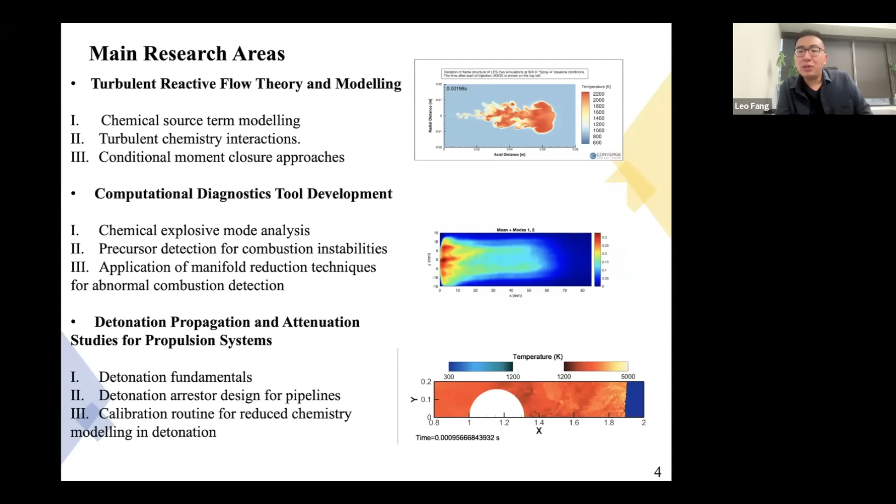So for this particular talk, my focus will be mostly on the first topic, which is turbulent reactive flow theory and modeling, and then specifically introduce one technique we think is suitable, maybe as an alternative for doing partially premixed flames. So a little bit of background. I'm sure a lot of you probably know this quite well, probably better than I do anyway. So what is turbulent reactive flow modeling? In CFD solvers, we would have transport equations for Navier-Stokes, energy and mass, etc.

And if we go with a symbolic form of the Favre averaged species transport equations, we can roughly divide the entire system of equations into a couple of things. For example, we have the rate of change term, and then the convective term, and that should roughly equal the diffusion term as well as the chemical source term. So the focus of my research is the closure of this term, called the mean chemical source term.

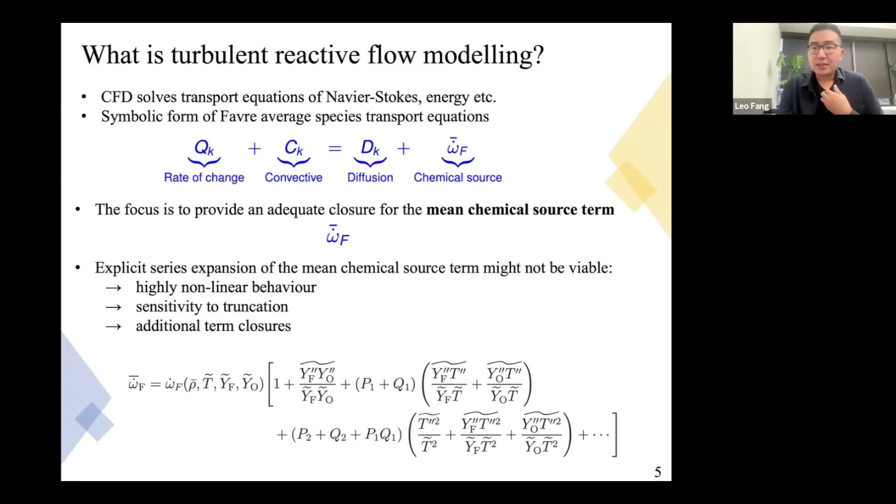So why is this term fairly important? Because an explicit series expansion of the mean chemical source term might not be viable, because it is highly nonlinear and very sensitive to truncation, and it needs a lot of additional closure for the different terms we include at higher order. So what options are available, and why is this difficult? The difficulty with turbulence chemistry interaction is that there are different scales we're trying to solve.

So on the left side, we have a physical system, in this case a reacting flow system. We have the chemical time scale, which means that for methane burning, for example, some chemistry happens at very fast time scales, and some chemistry has very slow time scales, for example NO formation, which is always a challenge for turbulent reacting simulation. And because it is a flow, we also have to cater for flow, turbulence, and diffusion timescales. This is relevant to non-reacting flow simulations, for example the approaches for closing turbulence terms.

So the idea here is that if we want something as accurate as we want, we probably want to resolve along this line, where we resolve everything about the chemical time scale and everything about the physical time scales. It is a bit of a challenge, but we will get something with good accuracy. And this is usually where DNS lands.

But in reality, if we are designing an industrial burner or an industrial product, at least from my experience, most industry partners are using techniques at the RANS scale, or some in the large eddy simulation range. So in that case, we will be resolving somewhere near this range, which means how we account for the interaction between the chemical and turbulence scales is a bit of a challenge. So this is what we are focused on, turbulence chemistry interaction models, and seeing if we can have a better model for the different conditions this flame is running at.

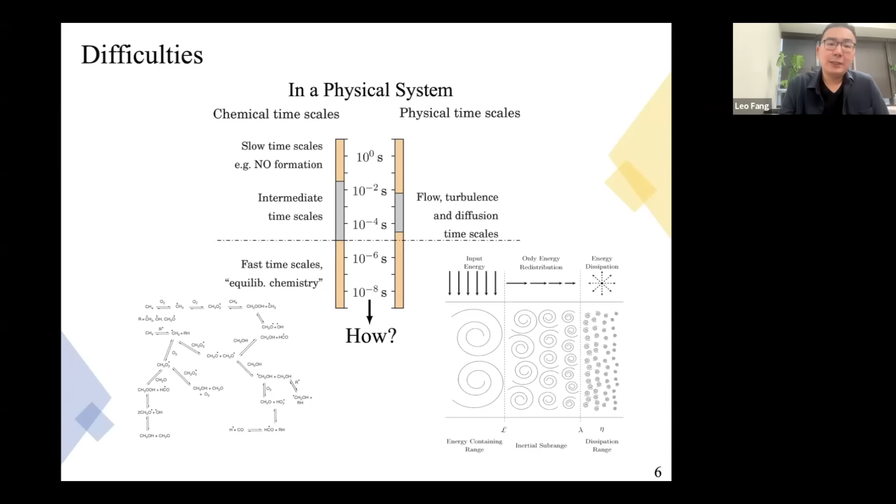So there are a lot of options available, and there are options that have been around, and there is a lot of development for each stream of this. I'm just going to do a very brief introduction of some of the techniques, but obviously there are a lot of other options and a lot of advancements around these topics.

So first of all, for a lot of us using OpenFOAM or Converge or ANSYS, one of the very well established, well used models is called the well-stirred model. What this does is assume infinitely fast mixing compared to the chemical reaction timescale. That means whenever you do a cell calculation, you already assume that the turbulence has well stirred this cell, and you have a well-stirred composition that you are taking into account,

which can help to understand the combustion itself. The advantage here is that you can incorporate detailed chemistry, and you can do a direct integration approach and evaluate the mean reaction source. There are some advantages because obviously it is widely used, so you will see this quite often, and it is probably integrated quite well with a lot of the software. But in this particular case, you might only have the first order moment, which I will explain, or only the mean of the scalars are considered.

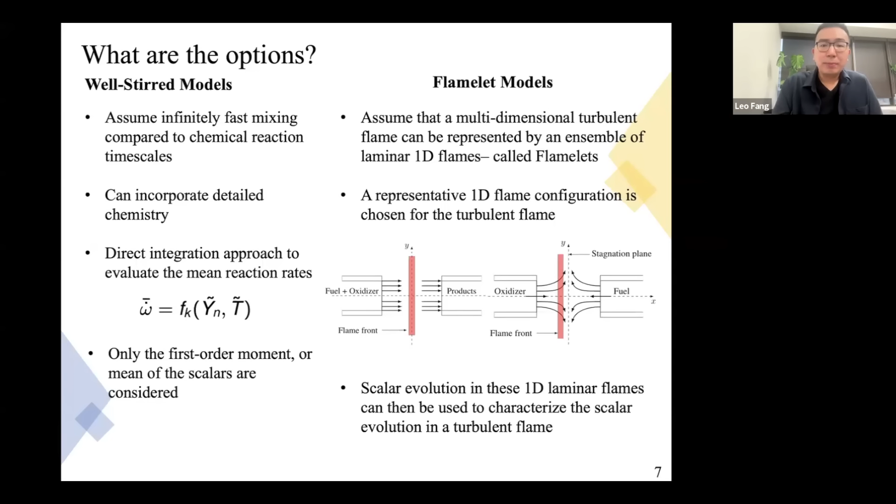For me and my group, we use a slightly different approach, and obviously this is not a new approach either. I'm going to slowly introduce this idea if you're not familiar with it. It's called the conditional moment approach. What we really care about is simulations that are not fully resolved. If you think about the scale graph, we're not reaching the scale of fully resolving chemistry and turbulence. We care about simulations relevant to RANS and large eddy simulations.

What has been found is that using the first moment might not be accurate. The idea here is to use a conditional variable to approximate this term, with the assumption that the conditional average does not fluctuate too much. So how do we explain this? If you look at the right graph, assume this is the flame you are simulating, and this is a representative grid you have in LES. Imagine you're setting up an LES simulation, and this is the finest resolution your grid is actually solving.

But magically, at the periphery of the flame, we happen to know the DNS exact result for this entire flame. That means you're looking at this grid, and this is what actually happens underneath it that your solver does not know. If we're using a first moment variable, say an Arrhenius type approximation for the chemical source term, we're using the average temperature, average mass fraction, and average density at this particular grid to get our reaction rate.

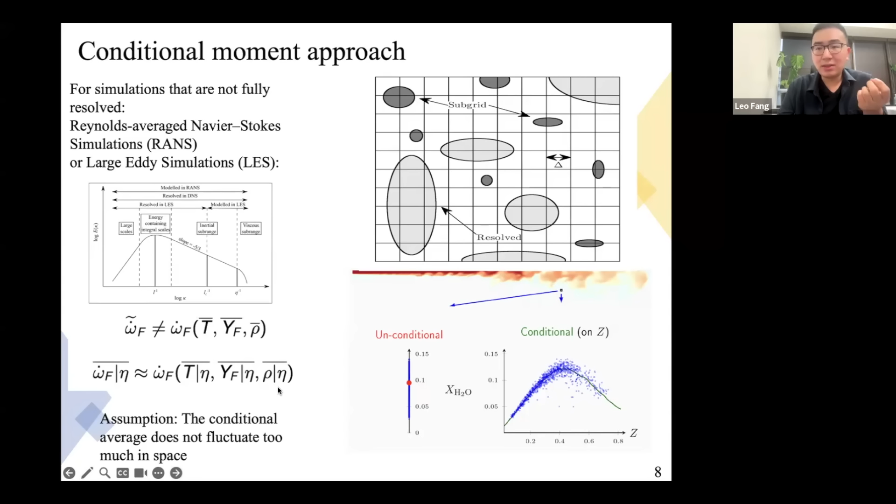And then obviously the challenge comes for any single particular field here. How do we get these values, right? Because if we want to approximate it, we still assume Arrhenius type. And then how do we actually get the values inside this bracket? Because the chemical source term is a function of these values. So one approach here is conditional moment closure.

The easiest way to think about this is: how about we just transport the conditional variables? Because it's a simulation, you can create any variable and transport it in the flow field, as long as you preserve the laws of conserving mass, momentum, energy, and species for combustion simulations or turbulent reacting flow simulations.

But obviously the challenge here is that when we try to close this, there will be quite a lot of terms. And because you are adding a lot of transport equations, it might be a bit computationally expensive. This is a very well-known approach, and there are a lot of new developments here. I'm not gonna elaborate too much, but that's one way of doing it.

So our thought, which came from my previous advisor, Kendal Bushe: we know that this is what we don't want for a particular flame, especially the one that I just showed, and we know that this is an approximation. We also know that in order to run a simulation, you have an initial condition, or you have already run the simulation from the beginning of the time steps. You prescribe an initial condition at least, which means at the previous time step, you would know exactly from the CFD solver the unconditional value of this, right?

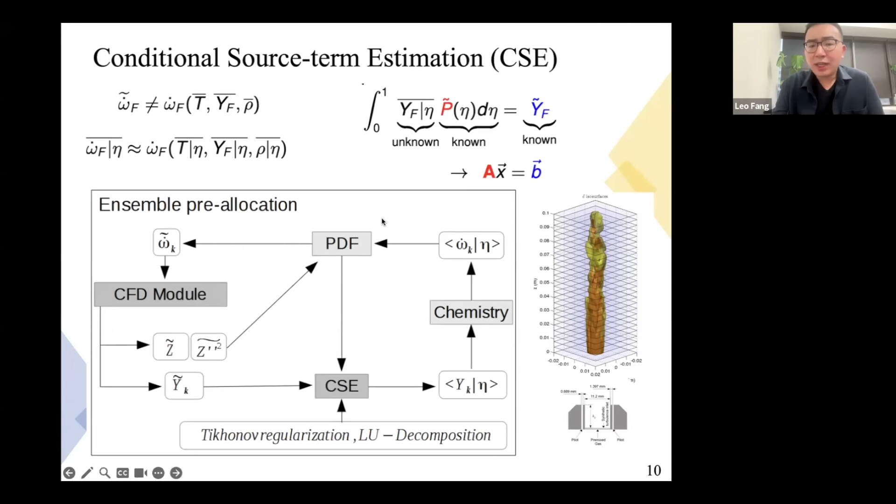So in this particular case, we did pre-allocation of the conditional source term estimation for the cell prior to the runtime. And then we did a bit of overlap of the ensemble, because we want to eliminate a little bit of discontinuity. And then each ensemble is assigned to one processor, ideal for flames with clear symmetry. This particular case, obviously, is a jet flame, so we can assume that. And this has been successfully implemented in Sandia methane flames, including C, D, E, F, where extinction becomes a bit more extreme.

And so one of the things that we had here was obviously the inversion, because all we really cared about was the conditional value here. And in this particular formulation, it is not about mixture fraction, it is about progress variable. So it can be used for both premixed and non-premixed, which means you can actually do the inversion, and then you can use Tikhonov regularization. We want to explore a few more regularizations in the near future as well, because there might be more developments in linear algebra that are probably way better than what we have done before.

And then we can reduce the matrix through some matrix manipulation to regularize it and to reduce the size of the matrix when we do the inversion. And then with a little bit of decomposition, we will get what we want, which is the conditional variables. So with that, we can sort of do lookup of chemistry. So this is similar to what a PDF method would do.

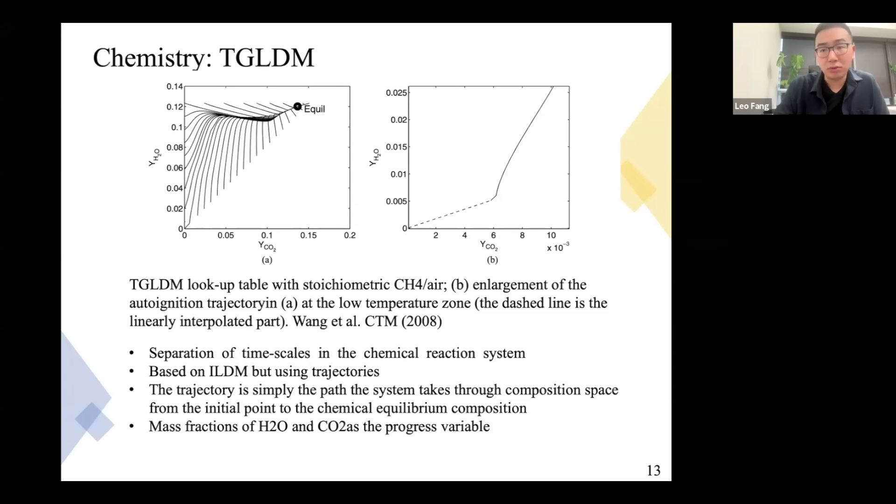So in this particular case, previously, they have used TGLDM, trajectory generated low dimensional manifold, in which we are using CO2 and H2O as a representation of the entire manifold. And then we can do the separation of the time scales in chemical reaction source terms, and then we do lookup, and we use the mass fractions of H2O and CO2 as the progress variable. So these were all developed before.

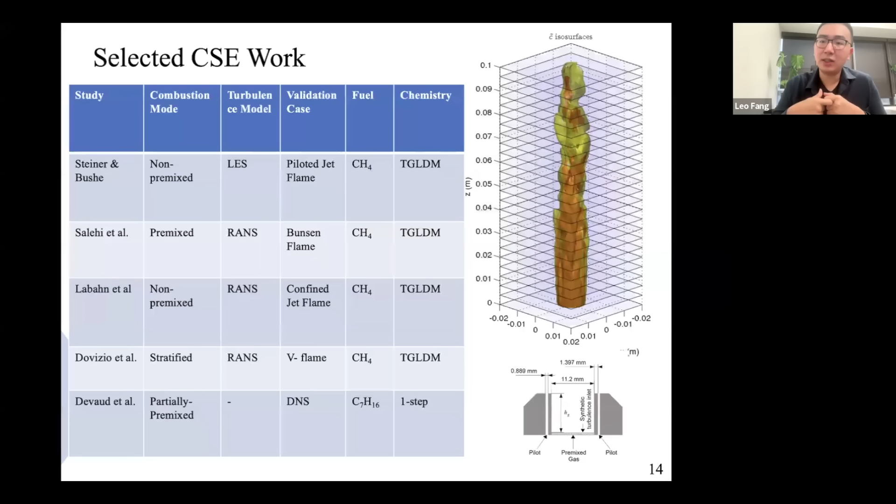But the challenge really here is that if you look at the successful implementations, at least before my PhD, most of these studies are actually relevant to methane only, and there is one more study relevant to n-heptane, but it's an a priori study for the CSE routine. So my PhD really revolved around whether we can improve this, because we found using TGLDM chemistry a bit more challenging with complicated fuels or higher carbon fuels, because the trajectories will cross over and it's very, very hard for us to construct something based on TGLDM for a higher carbon fuel.

So in this particular case, during my PhD, I was thinking about how we can use the conditional moment hypothesis, but how about we use the chemistry advantage of a flamelet generated manifold? Because in essence, what we are doing is that we need a chemistry model, but if we are already reducing the conditional fluctuations, we might as well assume that when the conditional fluctuation is very, very low at this particular point, this is probably as close to a flamelet model that is accurate,

very, very accurate. So in this particular case, what I have done is that I incorporated FGM not as a combustion model, but really as a chemistry lookup table to get the chemical source term directly. And then we use the CSE routine to close the turbulence chemistry interaction.

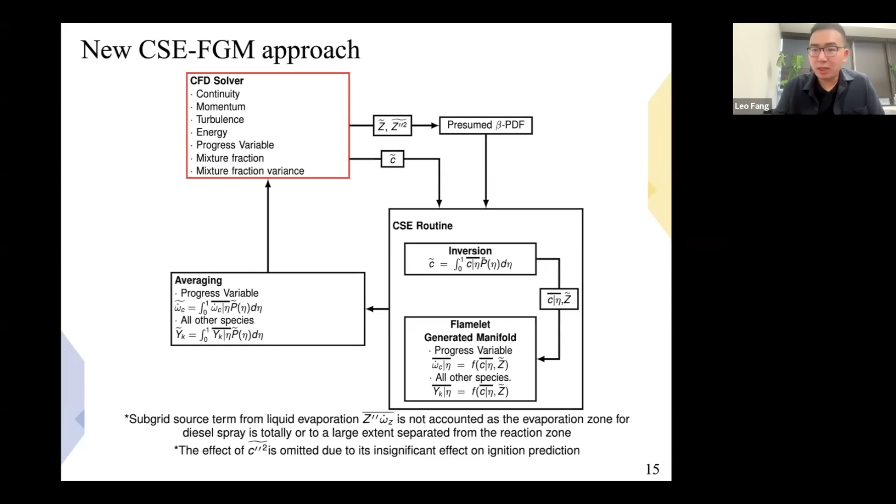So that was what my PhD was about, and we developed a CSE-FGM approach to enhance what this approach can do for higher carbon fuels, basically eliminating the hurdle of using CSE on a higher carbon fuel. So this has been quite successful. We are actually able to capture this flame, which a lot of you are very familiar with, with a very, very low resolution grid. This entire simulation is only about 1.2 million cells.

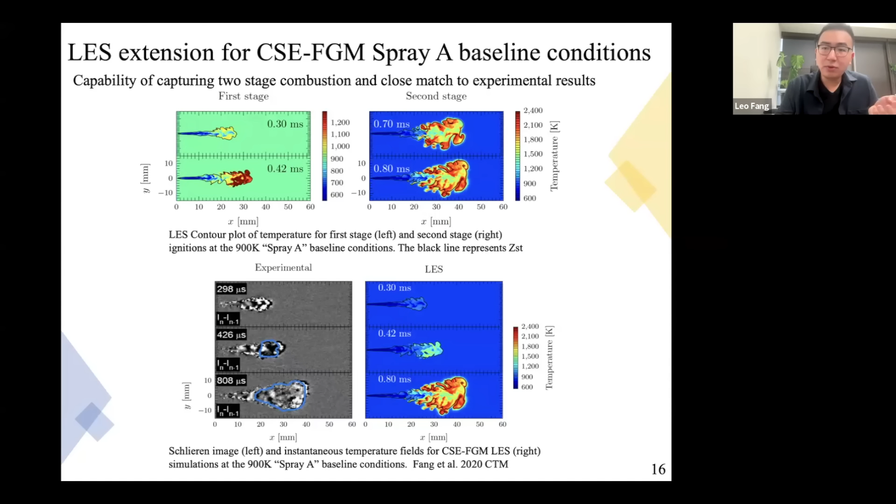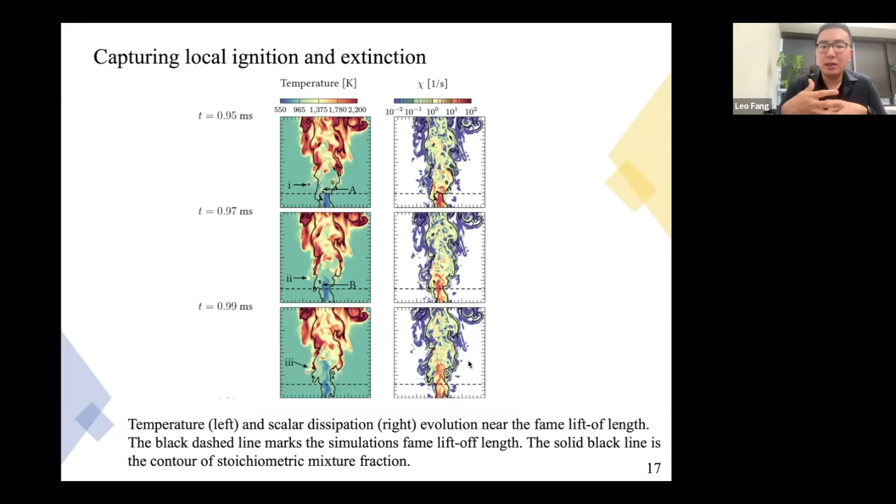And then we're able to characterize it very, very well in terms of the comparison. And probably more interesting here is that we are able to capture reignition and extinction, and the scalar dissipation rate effects on this flame in particular, because we're transporting Z and we're transporting Z double prime as well, so it's quite easy for us to do a little bit more study on scalar dissipation rate as well.

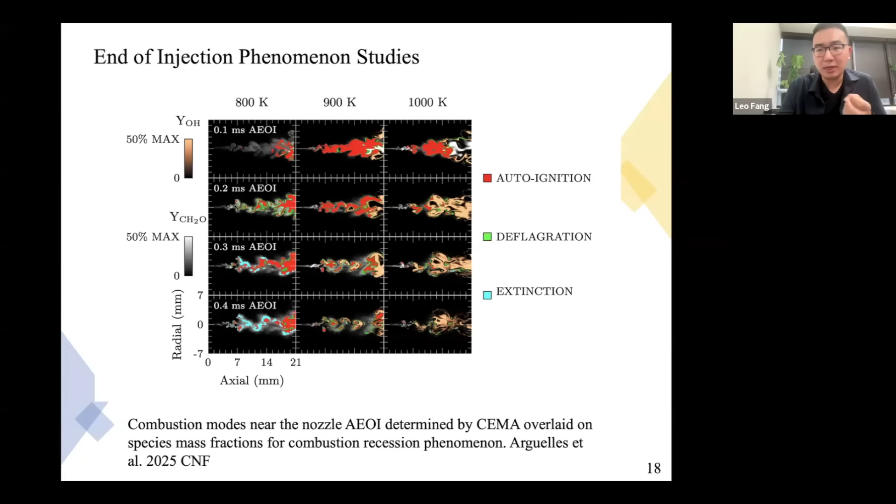And then recently our group did more detailed studies on computational diagnostics relevant to the end of injection, which is a missing piece in this particular flame. So we are studying how we analyze this particular spray, and what is its propensity to travel back at the end of injection during each cycle of the engine. Okay, so this is a bit of introduction to what our approach is. Now I'm trying to go further into what this topic really is and what we are doing.

So for conventional modeling, for a lot of the studies that I presented just before, we mostly catered to one particular type of flame. In this case, we say perfectly premixed flame, which means the conditional variable is not that bad. We can choose progress variable. And the second part is non-premixed flame. In this case, we choose mixture fraction for Spray A. But what happens if it's a more advanced system, let's say stratified or partially premixed flames? How do we cater to this?

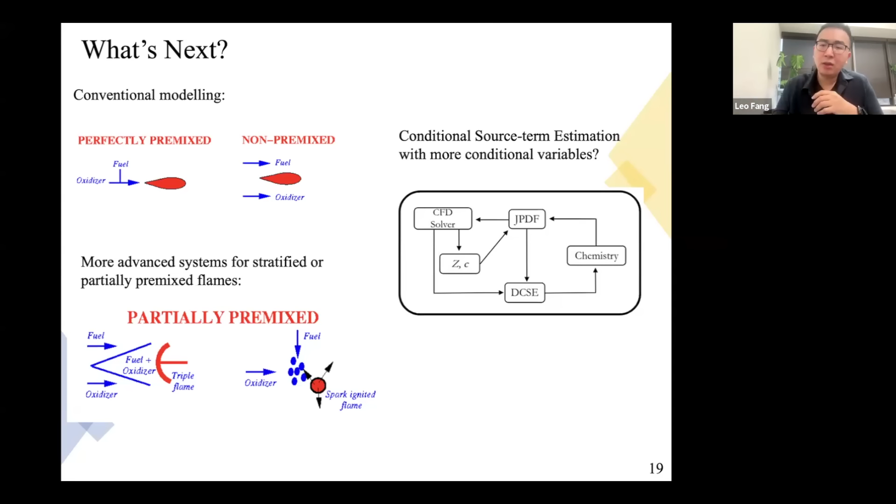So a very simple way to think about it is that maybe we should just directly incorporate a mixture fraction and progress variable. But really, before we do any model development, the question we should ask is, is that the right route? And how can we say that this is the best way to develop a new model? So this is the concept of the challenges that are actually relevant to this.

So first of all, remember in the conditional fluctuation, which I will explain a little later as well, in order to use this conditional moment related approach, we have to say that we can neglect the spatial gradients of any scalar. And the second question is, if it's a partially premixed flame, how many conditions do we need for this partially premixed flame to have the assumption that the spatial gradient is actually minimal?

The second question we have is about conditional variables for different flames. Mixture fraction is probably well known in this community; with Bilger's definition, it is probably good for non-premixed flames. The question then comes to, how about progress variable? If we go to the literature, there are quite a lot of definitions for progress variable, especially when we are using, let's say, n-dodecane or heptane, or a more realistic fuel that we're using for liquid propulsion or liquid energy.

What are the appropriate assumptions that we use, and does it really matter what type of definition of progress variable we use in this particular case, or for our model? The last one is that if we are using two conditional variables, for example, the idea here is that we are doing the integration twice, and then we have this probability density function.

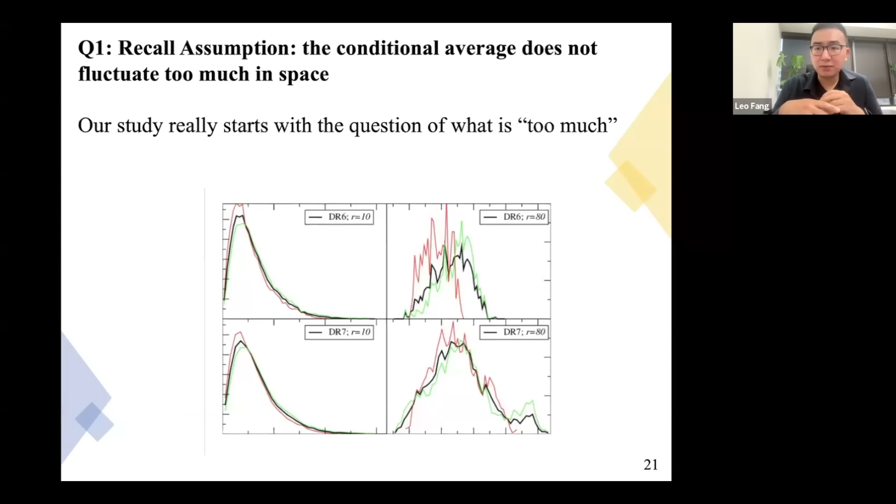So what we thought about, first of all, is it valid to neglect spatial gradients for partially premixed flames? And how many conditions do we need for partially premixed flames to make this variation small? When we thought about this, ideally, we would have a lot of DNS for various flames. But in this particular case, we thought there is actually enough experimental data in the community.

For example, we have a lot of measurements for Sandia flames: Sandia C, Sandia D, Sandia E, Sandia F, which include jet flames with low or no extinction, to moderate, to intense extinction. How can we treat this entire flame as a huge data set, very much a DNS itself, and directly study the conditional fluctuations based on this?

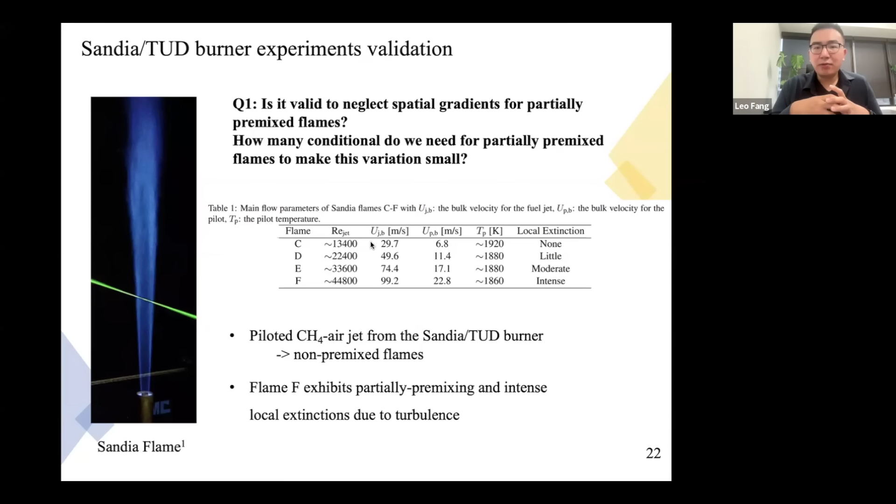And then maybe we can get more interesting results, if we assume the experiment is done very well, which it should be, because it's a very well-known data set that we use for a lot of benchmarks. And then we can use this for our hypothesis testing. So what are the results?

In this particular case, what has been done is that we take the local average of the conditional fluctuation of the species mass fraction, for every one of the species, around the conditional average, for, let's say, Sandia D alone, using only mixture fraction as a single conditional variable. We collect all points at the radii together and plot them as a function of the radii and axial location. So how do we read this?

If you look at this, this is the radii, so this is the spatial location on the 2D flame axis. And what you're looking at is that the fluctuation of the CO2 is actually very small, at least further downstream of the flame. There is something happening here, because we had a discussion with the experimentalists as well. There might be some fluctuation in the experiments at the exit of the flame, so that might be the trouble here, and we are seeing that it's not really consistent.

But the idea here is, if you look at the scale, this is 10 to the -3, which means that it is probably an okay assumption to condition on one conditional variable, at least for a Sandia D flame.

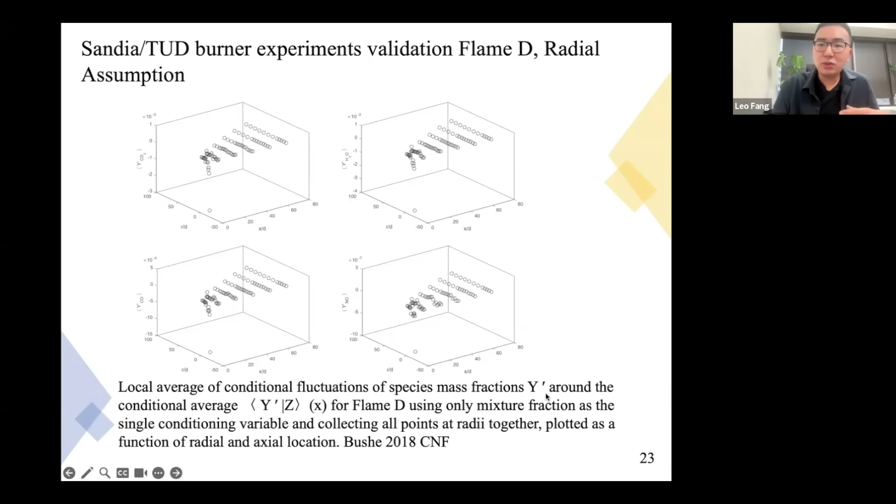So which means that there's not too much fluctuation using a CMC type of approach for this particular flame at least. So how about we combine C and F? Because if you combine the flames from C to F, the idea here is that we're actually thinking about a flame that transitions from low extinction all the way to high extinction, which means it includes a partially premixed

assumption. So then if we do that, our hypothesis is that for a partially premixed flame, all we need is 2 conditional variables. And in order to make this assumption right, this fluctuation should be small as well. And in reality, yes, it's actually much smaller if we use 2 conditional variables. So in this particular case, we saw the scale of the fluctuation is actually orders of magnitude smaller if you use 2 conditional variables.

So the physical insight of this really is that when you do a simulation of a partially premixed flame, even if we don't know the spatial location, if we know a particular location's mixing state, which is described by the mixture fraction, and if we know how much this has burned, which is described by the progress variable, then we can describe everything that is relevant to the thermochemical state of this particular grid anyway.

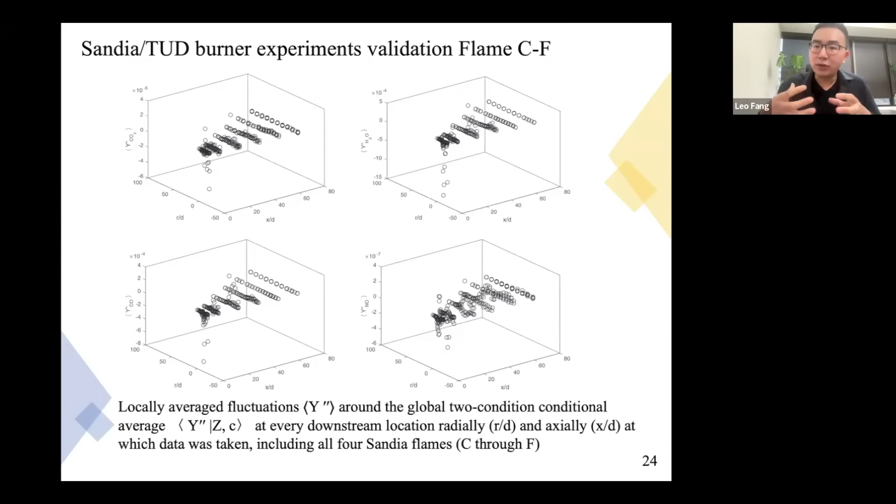So this type of validation is not only applicable to conditional moment closure or CMC type of approach, but also helps validation for flamelet-related research using multiple conditional variables. So that was an interesting start for us. And there are a lot of findings, which means that single conditional variables vary significantly in the downstream direction, and using a single and global condition for flame D might still be acceptable.

And this analysis for C and F also indicated that the conditional fluctuations do not exhibit any significant dependence. And bear in mind, these are different flames with different Reynolds numbers. So that means the Reynolds number doesn't play too much of a role as soon as we know the mixing state and the progress of the flame at this particular location.

So in this particular case, we will say we probably need at least 2, or maybe 3 if there's, let's say, a bluff body, because in these conditional variables we didn't include anything that has heat transfer, right? So that is one of the very big studies of this assumption that my advisor previously did.

And the second part that we did, following on this, is what are the best conditional variables for the flames. Now we know that for partially premixed flames we probably need at least 2 conditional variables. But what are the conditional variables, or does it really matter? That was always the question: a lot of studies try very hard to find a good definition of progress variable for a particular flame. But our question for our particular model is, does it really matter?

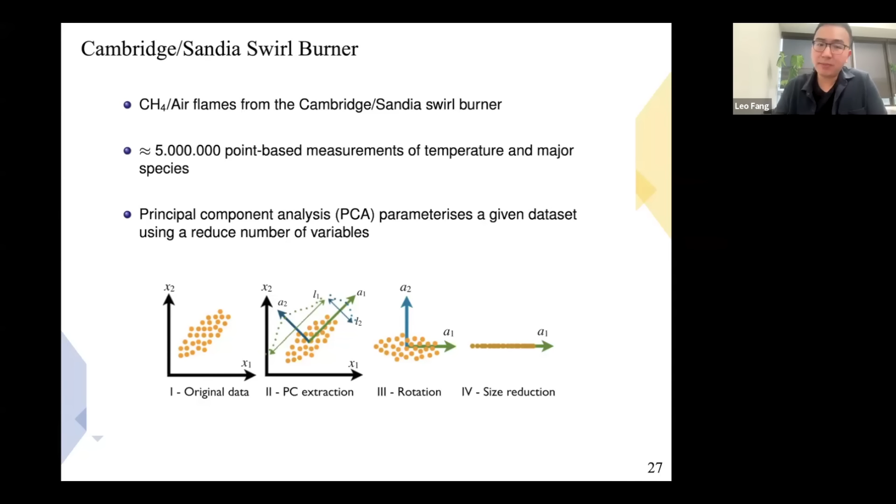With two variables, we believe is the most important part for this flame. And then the results really are actually quite interesting in this particular case: if we do a very simple progress variable and then principal component analysis for this, it's actually aligned with mixture fraction and progress variable, very much aligned together.

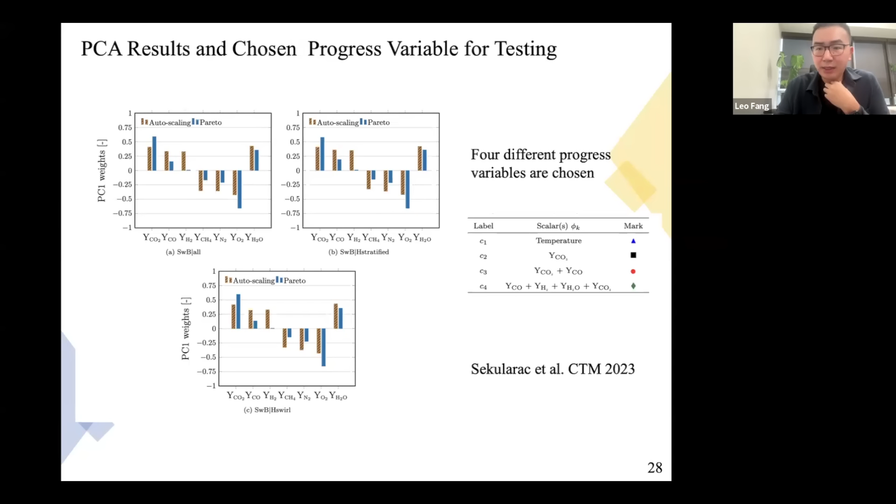And then one of the ideas here is, if we do this particular thing again, in the same paper we tackle one more question that we have: how about choosing a different type of progress variable? Would it make a huge difference? The way to look at this is that we chose one particular progress variable alone to see the conditional fluctuation of this. And then we chose two different types of combination, which include progress variable and mixture fraction.

And then in this particular case, we found that it's actually very hard, and arguably difficult, to say which progress variable definition is going to help a lot more for fluctuation of RMS. But it is actually quite evident that if you use two conditional variables, your fluctuations will be very low.

The implication for us really is that if you are a modeler, especially if you're coding a transport equation for progress variable, you can actually choose the one that is much easier to code, which means that in reality, the fluctuation is not going to make a huge difference, especially for our approach, which is based on the conditional fluctuation. So that was one thing that we found, and then obviously we had some further development to propose something else.

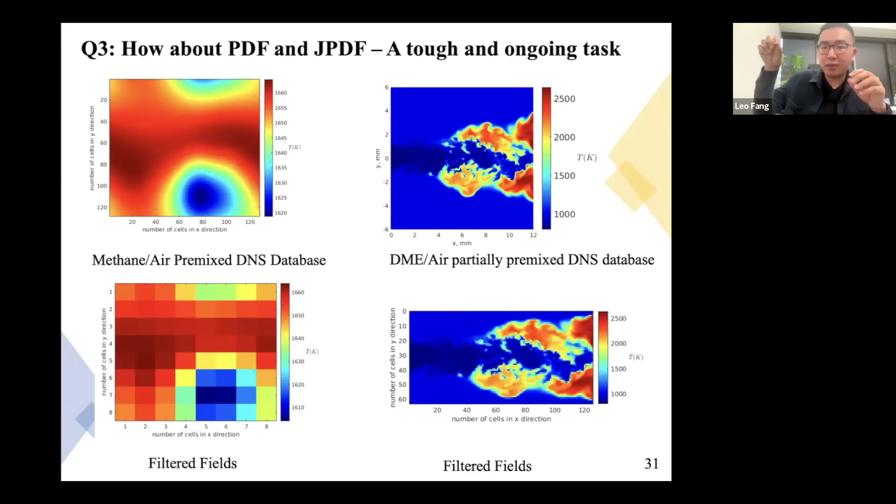So one of the things then, sorry, I'm just a little bit rushed here again. So what about the PDF and what about the JPDF here? So the question then is question 3, and this is a tough and ongoing task that one of the PhDs currently working with me is working on: eventually, once we have this hypothesis, the next question we have is how do we have this PDF and how do we integrate it together to make a routine that actually calculates the chemical source term.

So in this particular case, we did have two DNS data sets, one from Lund, thanks to Professor Bai, and also one from Argonne National Lab from Dr. Xu, who provided this data set to me, with different characteristics. So we're testing, first of all, what presumed PDFs have been used in this particular case. Most of the literature would use beta PDF, and some of them use clipped Gaussian PDF. And we're just seeing how good a representation of this particular flame it is.

What is the PDF that is most relevant to this particular flame? And in this particular case, we are evaluating the joint probability density function of it. So this is, again, a bit of an ongoing hypothesis test. So basically, the framework of this particular set of research is: can we move alongside every single step of our development through hypothesis testing, through theoretical validation.

And then there are a few things we want to be working on at the moment: we need to work on a proper improved version of presumed PDF, because it's in submission at the moment. We're understanding what is the effect of assuming statistical independence on a particular flame. And then with the joint PDF, can we use something that is a bit more clever? For example, we are trying to use heavy-tailed presumed PDF, because some of the statistical behavior of the progress variable does not align very well with beta PDF.

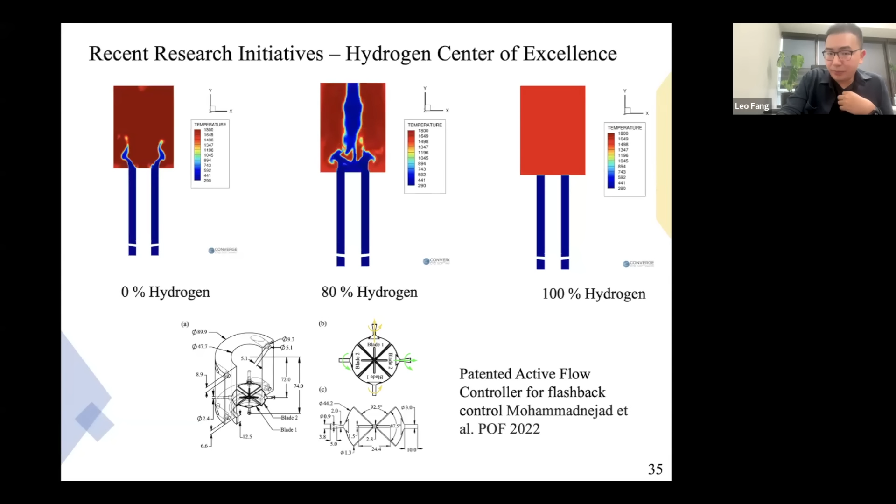So we're trying to do this active flow control for flashback with Dr. Sina Kheirkhah's group from UBC. And we're trying to see the differences in blending for this particular burner, and what the effects on flashback will be. There are some preliminary simulations we did for other types of swirl burners just to validate what's going on with the flashback with the particular model that we're developing. And then there is further development of how we actively flow control with these models that we have developed, to do industry applications.

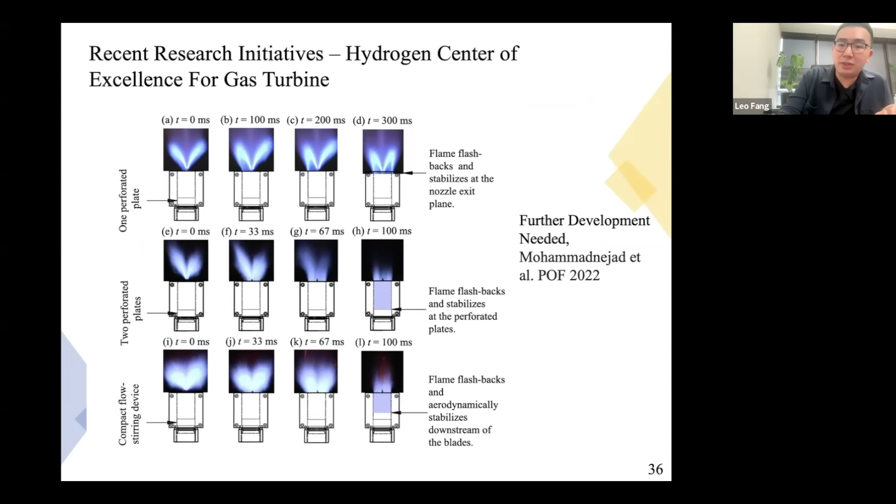The last bit was probably a bit interesting to me, at least. So when I was a PhD, my housemate was in cancer research. He was trying to identify the mutation direction of a specific gene in the location of a particular tumor. So I was saying that I was doing exactly the same for chemistry: how do we actually identify what the manifold is? At that time I was doing TGLDM, to identify where the water and CO2 go through this flame in a conditional sense.

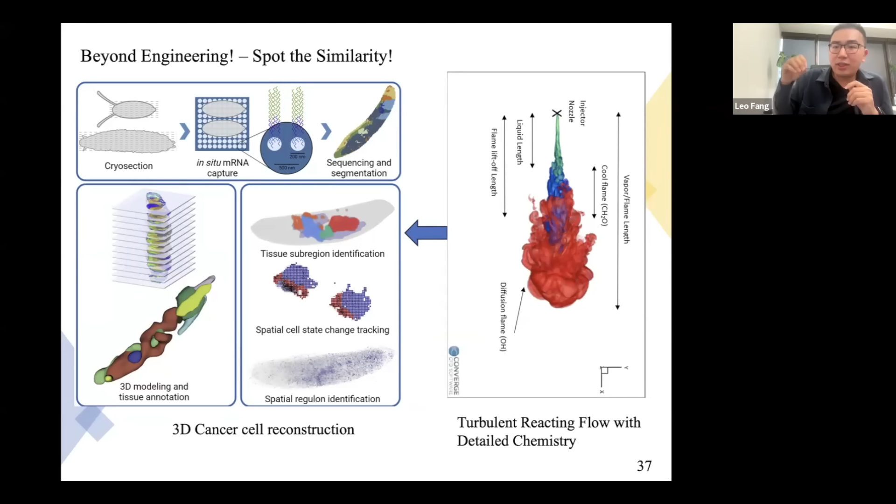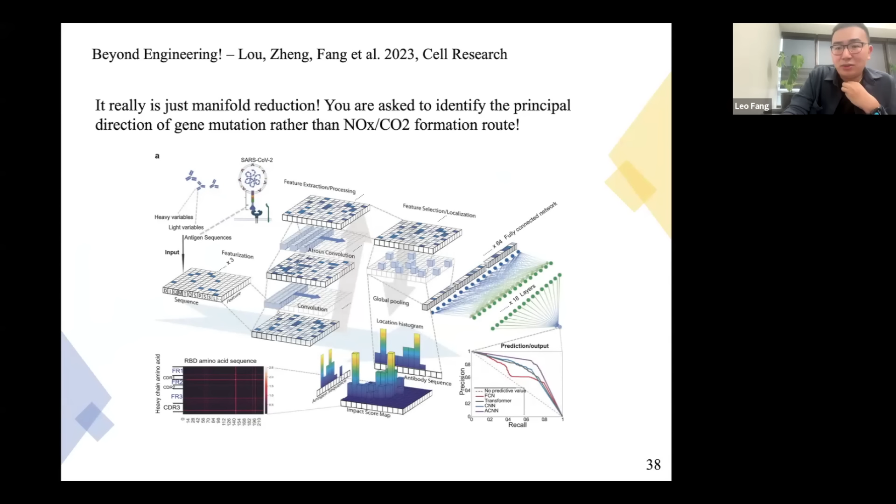So then we did this kind of weird collaboration, thinking maybe RNA works exactly the same way, where RNA would cluster together in a trajectory and then go through this development through the cancer cell. And this magically kind of worked. The idea here, for me in particular as a junior faculty, is that combustion science is quite fun, and we can actually apply this theoretical checking to a lot of other fields.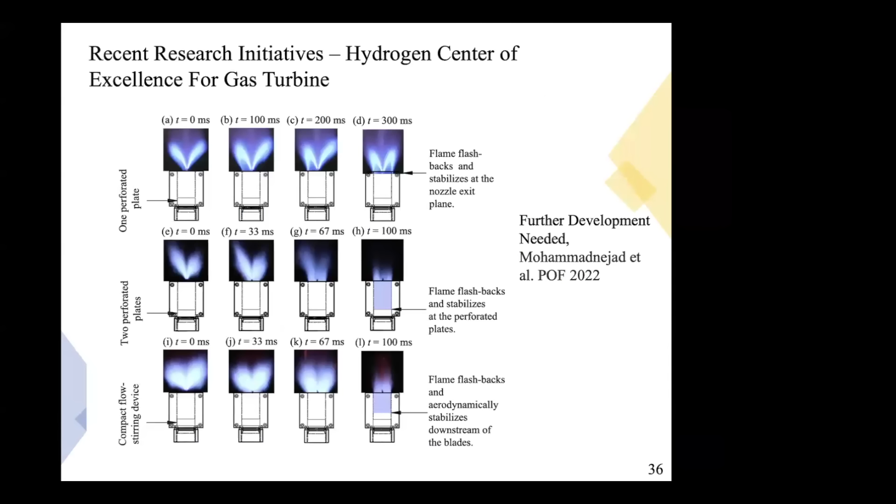Thanks for the presentation. I was just wondering, when you apply PCA, have you identified potentially a third PC which might carry some variance in the data or might be relevant to characterize what you're investigating? In this particular case, we are only looking at a partially premixed flame, the Sandia swirl burner. Previously we have done some testing with a bluff body dataset. We found whenever there is a bluff body, we probably want to consider something temperature related, which means for conditional variables we probably need something like total enthalpy, or something relevant to the heat loss.

In this particular routine, though, because the fluctuations we found are small enough in the range of the data set, and when we reconstruct it the accuracy is in the range of maybe 2% of the fluctuation, we think two directions are good enough. But as I said, this hypothesis test analogy would probably be more relevant to test sets characterizing the swirl burner at different conditions.

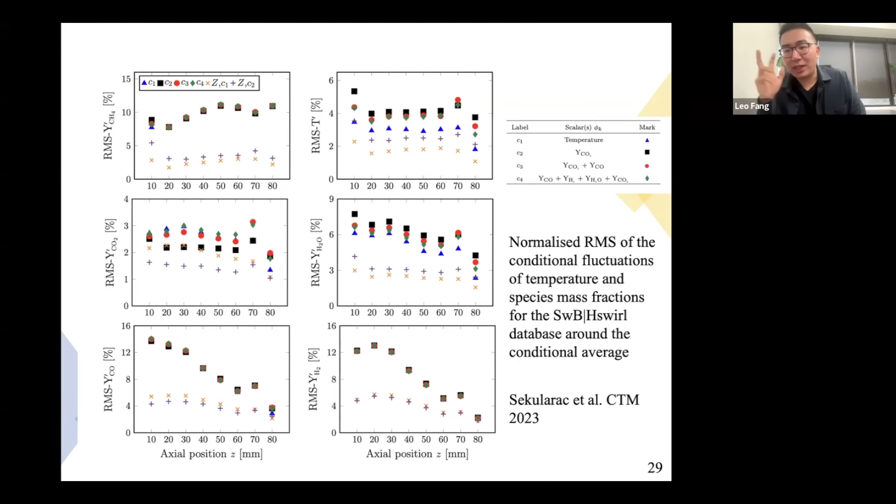But I had a discussion with Kendall as well, and we thought if you can describe the location of the flame with the mixing, with the progress, and with how much heat was lost, we don't think you need additional conditional variables or additional principal directions. That's what we thought. Okay, but we could be wrong.

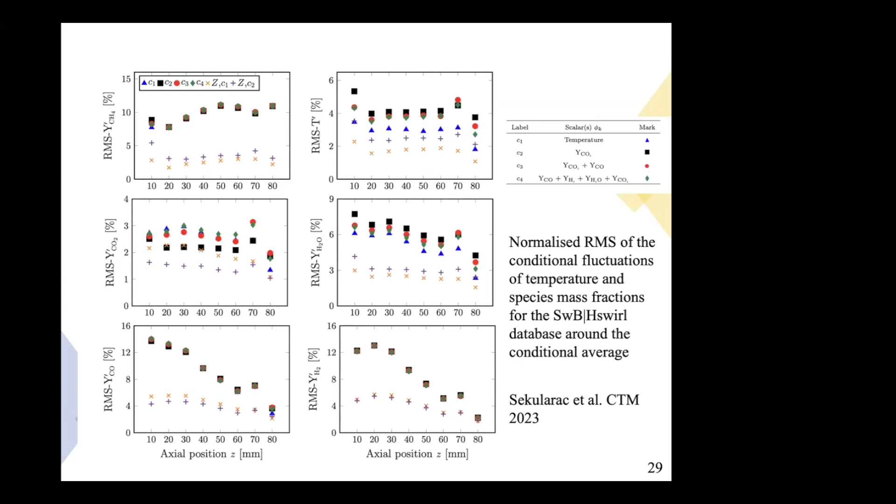If I may have a second point. You mentioned a massless progress variable for H2 combustion. Would it be a passive scalar, or how would you interpret it?

I would interpret it as a passive scalar, because you think about it as ink. Well, obviously this is in development; one of the students is working on this. The idea here was that we would put a massless scalar that just goes with the flow, and then it has the diffusive behavior, and it's a passive scalar. Which means it's like a background transport equation that does not go through mass and momentum conservation.

So in reality, what you think about is it's water, and then you put a dye in it, and then it diffuses. That's the natural diffusion that is going to happen in this flame. Which means the chemistry diffusion should be referenced to this, maybe a fraction of the diffusion relevant to this. If it's hydrogen molecules, it will be a bit faster than this dye, whereas if it's a carbon-related fuel, it should be relatively similar. So that's one way of thinking about it. It should be a passive scalar. Okay. Thank you.

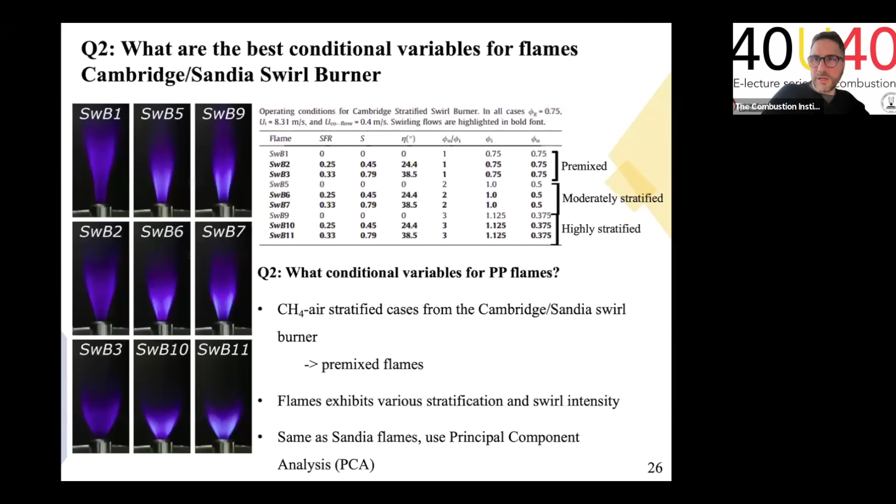Thank you, Salvatore. There is a question in the chat. Alexandre mentioned that in slide 20 you have a PDF graph with alpha and beta parameters. No, this is specific for mean and variance, so it's inside the beta formulation. You have alpha and beta, and they're mean and variance related. Alexandre, I don't know if you want to add on this question or it's clear. I think it's okay.